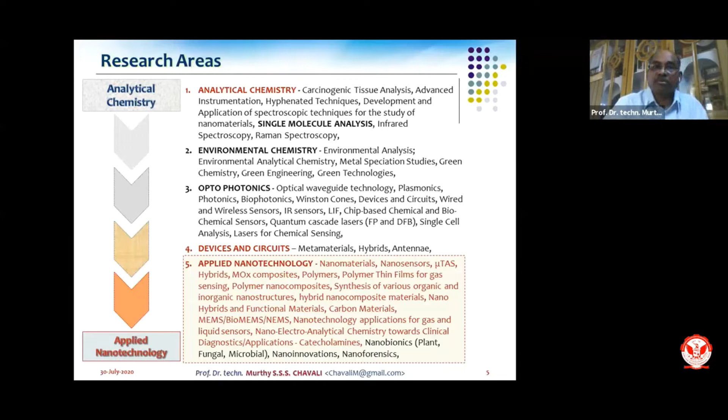At the outset, I started my career as an analytical chemist from Hyderabad JNT University, and then I moved on to different things, to chemical physics, then environmental chemistry, optophotonics as a postdoctoral program in Lawrence Berkeley National Laboratory, where we needed to develop and synthesize the materials for waveguides and fiber optics, which they call chemistry for synthesis, and they took me into this program, though it is not really related, but mainly it is applied oriented.

So we have to take this up, and it gave me some additional knowledge which is helpful for me in doing cross-disciplinary research. And then in applied technology, we are working on nanomaterials, nanosensors, µTAS, hybrids, MOX, metal oxide composites, polymers, and what not. If we see an application related to these things, we apply that in that particular field so that it is useful for society, industry, as well as academics.

So that's why we specifically call ourselves applied nanotechnologists, because our problems don't come from our side or from our group. They directly come from the industries for us to solve and provide solutions. So we start from material synthesis to packaging, device fabrication, integration with electronics, and then commercializing after publications and patenting. That's what we do in these particular areas.

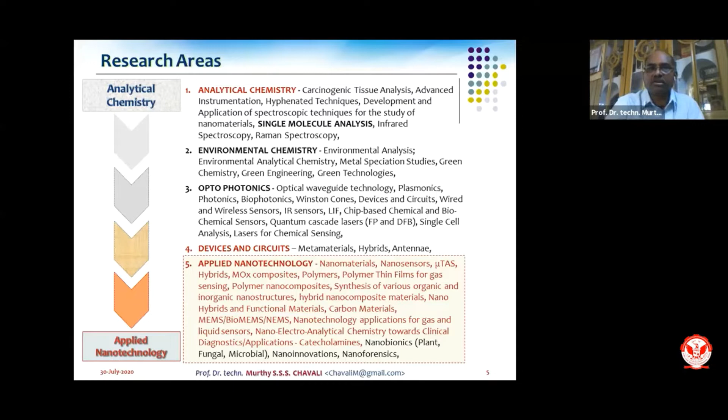And now we started a new group in nanotechnology, which is nano electrochemistry for biomedical science and biomedical molecule analysis, on which I have 2 or 3 slides. In addition to these things, we also work in the fields of pharmaceutical, medical, mechanical engineering, electronics and communications, petroleum engineering, and computational studies, which we recently added to our programs of research. At the same time, we are also trying to switch towards biomass gasification for sustainability. This is in brief what our group does.

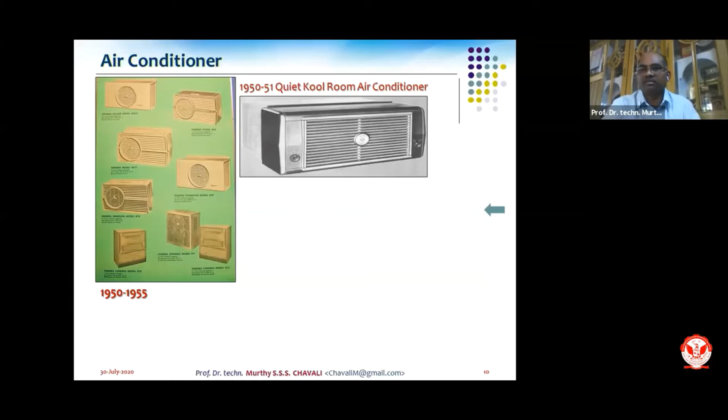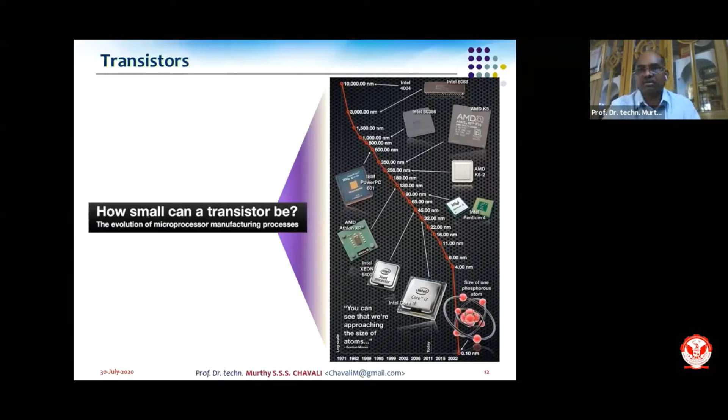And since your expertise is in electronics, you can easily understand how the size of the transistor has come down from 10,000 nanometers to almost 6 to 4 nanometers, and it is still going down further, reaching close to atom size. And most of you know what a flash drive is, what a USB drive is, or what a hard drive is, and types of hard drives, SSD and HDD.

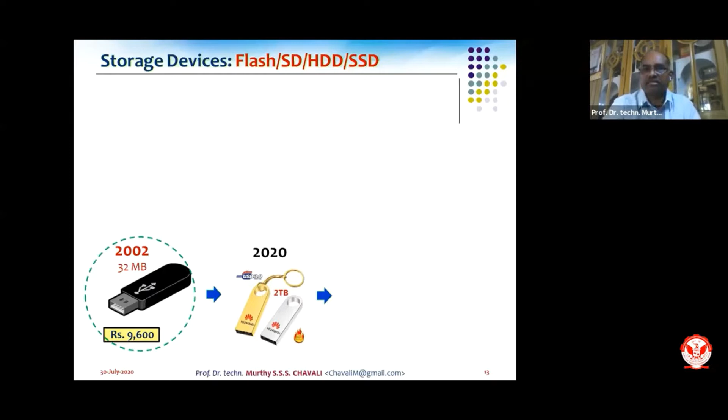In 2002, I purchased my first flash drive, which is 32 MB, and it cost nearly 10,000 rupees. And now in 2020, you have the same size, but the volume is going to be 2 terabytes. This is where miniaturization or nanotechnology comes into the picture, so that you can minimize and increase the capacity, and in 2024, it is going to be like 64 TB in your USB flash drive.

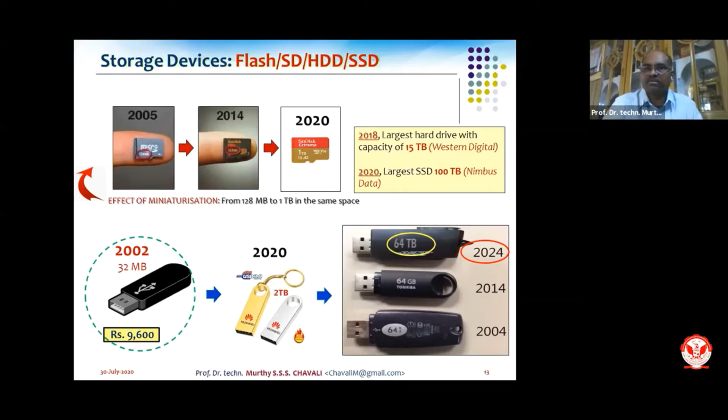But why do we go for miniaturization? Because it has several advantages. Though it might have one or two disadvantages, it does have meaningful advantages, like minimizing the energy of the entire device. And once you minimize the energy, the device is going to be smaller, and the material consumption to manufacture this device is going to be simpler. And you can integrate these things into several platforms, and the statistics of the results output in terms of redundancy in errors of these arrays can be reduced and understood easily. Integration is possible and it is simple.

At the same time, the power budget is going to be reduced. These can be faster because of the simple technologies used. They are less in weight, so easy to carry. And if you talk about sensors, the precision is going to increase, accuracy is going to be great, with increased selectivity, sensitivity and reproducibility. And often there is a possibility to integrate into new devices that are going to come over a period of time, and this can be accommodated in a portable way. In addition to that, they also have some negative impact.

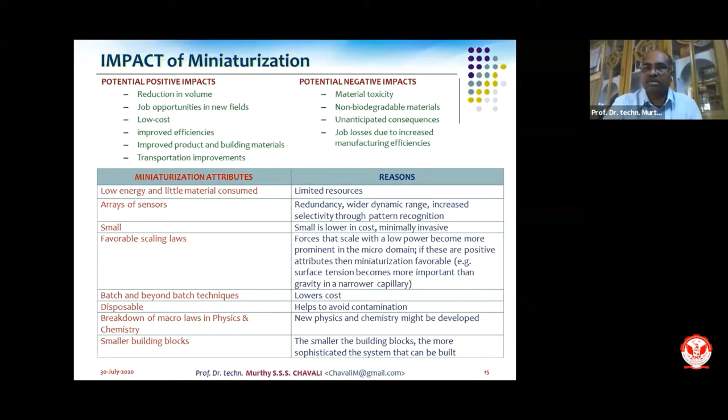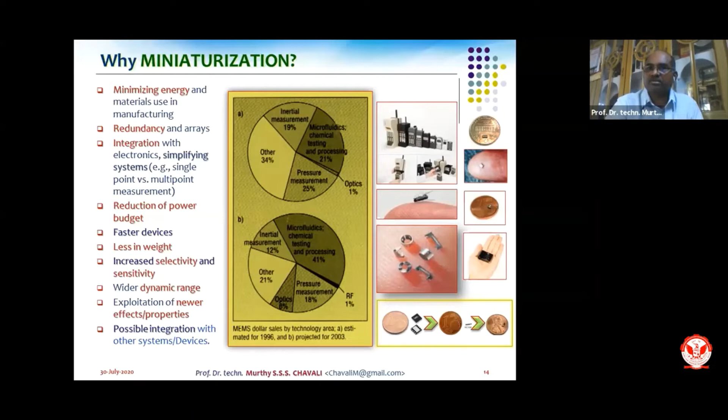And we started to work on gas sensors after seeing these microfluidic lab-on-chip devices and MEMS-based gas chromatography. Gas chromatography is a big one; it occupies almost half the size of a room. But these people have converted the entire thing into a small 5 centimeter unit, which can perform most gaseous separation, and there is a lab on chip which performs the entire functions of a diagnostic center on a chip of 10 centimeters. Moreover, these miniaturized devices are highly accurate in terms of design, architecture, assembly, integration, and packaging, where they found some problems in packaging but overcame them later. These two perform exactly the same way as the macro devices.

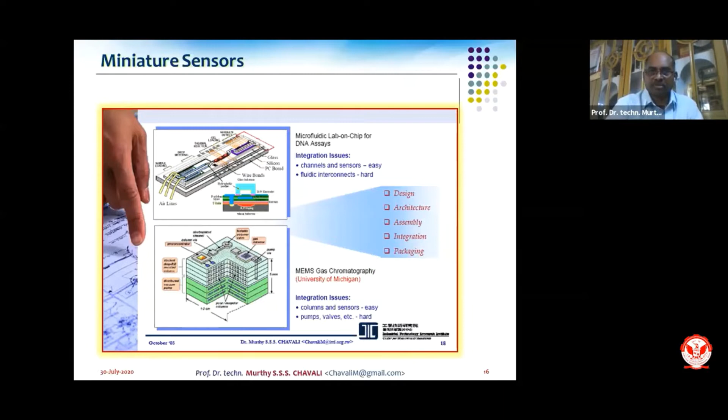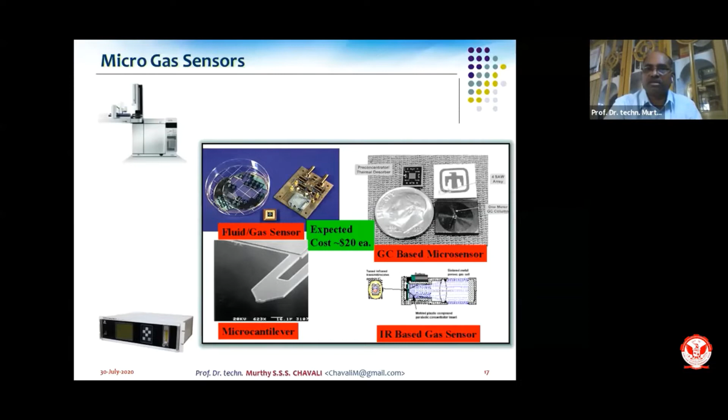So with this, since people have started gas chromatography, we thought of getting into FTIR spectroscopy, because that is the area where I work on. So we want to miniaturize that. And during that particular time, we have seen GC-based microsensors, fluid gas sensors or volatile gas sensors, micro cantilevers, and infrared-based gas sensors. With this infrared-based gas sensor, we thought of developing our own system for gas sensing in parts per billion levels, not in parts per million, but in parts per billion and trillion levels. And the size of this particular system we designated as 5 to 6 centimeters, not beyond that.

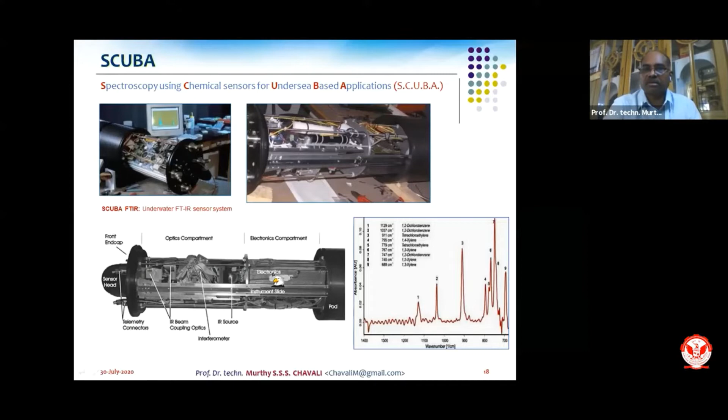We started with Bruker FTIR. We replaced the sensor head, and we have developed something for seawater analysis, where the analysis component, obtained from this front-end sensor head using the same electronics but a different layout and architecture, is exactly the same. And this has been published in Applied Spectroscopy. And we started with a miniature setup for FTIR, where we use the interferometer for analysis, but actually we have removed that one by adopting hollow waveguide technology and incorporating another Winston cone. This simple module has been converted into small 10 centimeter units for FTIR analysis with the same source as well as the same detector we use in commercially available sensors.

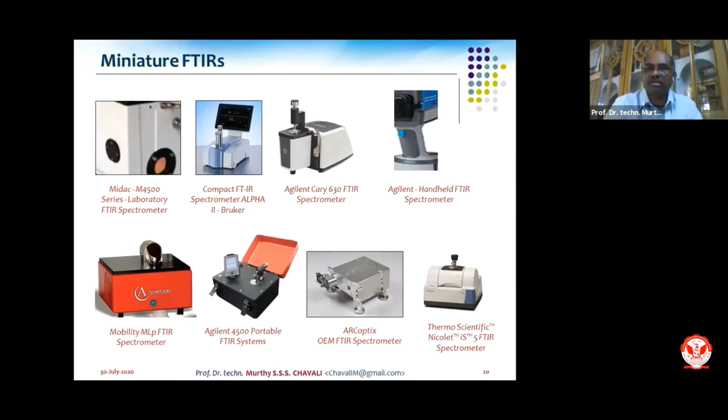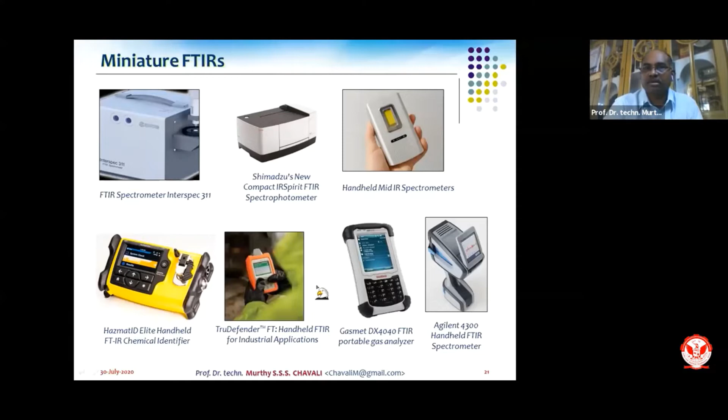So we went for a review of available handheld miniaturized devices, but most of them are highly expensive. So we want to have a very less expensive FTIR for gas sensing in parts per trillion levels. These equipment give only percentages or parts per million, but we are targeting parts per billion and parts per trillion levels. Initially, we failed in getting parts per trillion, but somehow we ended up in 100 ppb levels. So that is close to parts per trillion. So we are happy with that.

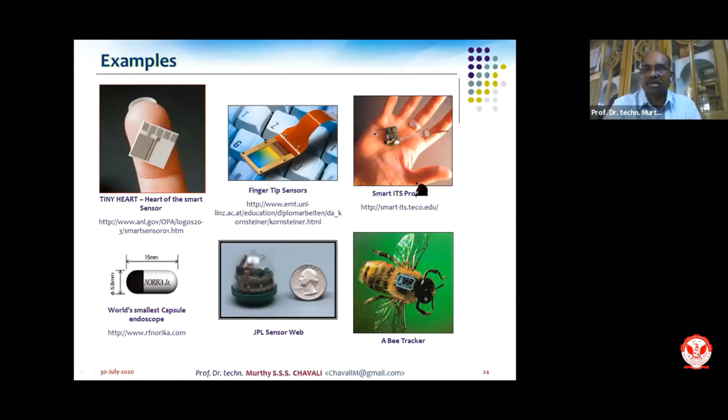And some of the examples, if you take the miniature devices, you can see the smallest capsule for endoscope. You can see the Jet Propulsion Laboratory sensor, which is almost the size of a quarter. And you can also see the Smart ITS sensor, which is on the palm. So these are the simple miniature devices which inspired us to talk to these people. And we have noted some of the sensors like the medical telesensor chip, which is on the tip of your finger, where it can measure the temperature and at the same time transmit the body temperature to other devices. And you have an IR microspectrophotometer for blood analysis, gasoline octane analysis, and environmental monitoring, which is again 2 centimeters in size. This can also be used in chemical warfare agent monitoring, and this can also transmit.

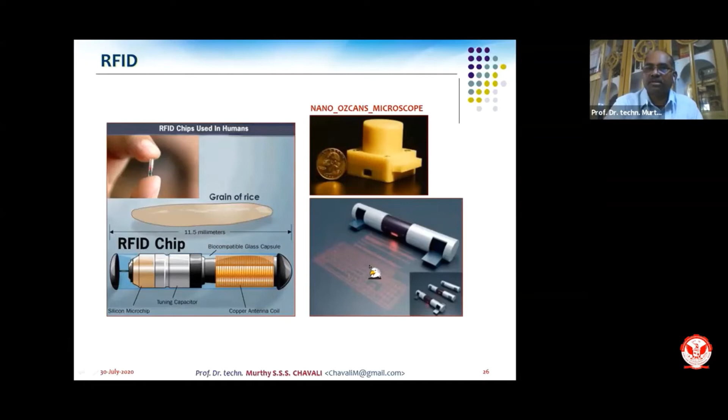So similarly, the entire optical bench of 1 meter came down to 1 millimeter size. These are the advantages of miniaturized sensors. As I showed you the endoscope capsule, we also have an RFID sensor, hologram, and microscope almost double the size of a quarter. So inspired by this, and also by colleagues in other departments working in the field of nanotechnology, we ventured into this as a postdoctoral program, where we were fascinated by the integrated application of nanotechnology, where it combines the biological principles of the materials and the laws of physics and chemical properties of these materials together into one, so that you can develop something in a different way. So our publication volume has increased because we published with macro sensors, then converted to micro, and then converted to nano sensors.

And after converting it to nano, we went into nano arrays. And from nano arrays, we went into wireless sensors. So typically one exact work combining with different platforms resulted in 4 to 5 papers. So since this nanotechnology is going to be a key enabling technology, with the volumes of sales reaching billions, and it also has significant benefits to the environment, and it can be applied in each and every subject, we ventured into it.

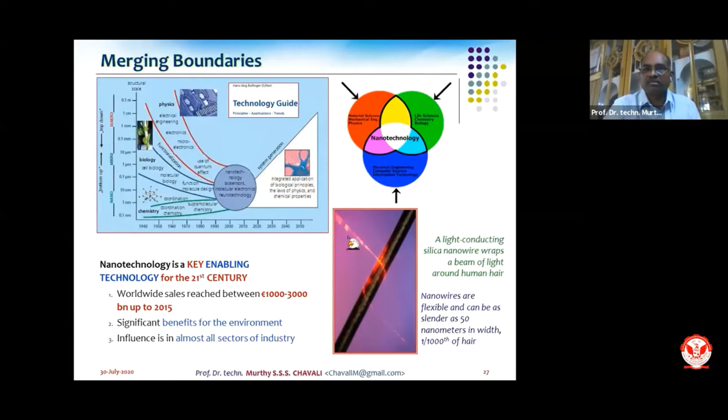Since then, we used to get most of the industrial problems for us to solve. So with this, we were able to do everything related to industrial applications, and that's how we entered into applied nanotechnology. I'm going to skip this one because most of you are aware. And why do we use nanomaterials for sensing? Because it has simply improved physical and chemical properties. And if you use some of the dopants and if you change the architecture or layouts of this, that itself can act as a sensor.

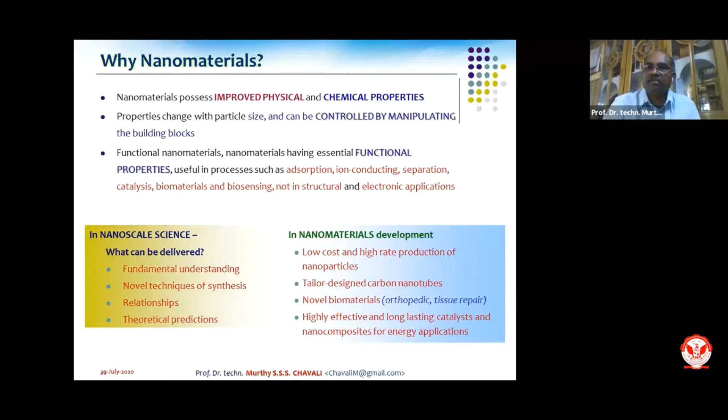For example, if you take a single wall nanotube or multi-wall nanotube, just entwining them can change the resistance or conductivity within the tube. That itself triggers the difference between before and after contact with the gas, and so it can act as a sensor. And additionally, these nanoparticles have unique properties. For example, opaque substances become transparent, like copper. Inert materials become catalysts, platinum. Stable materials turn combustible, aluminum. And solids turn into liquids at room temperature, gold.

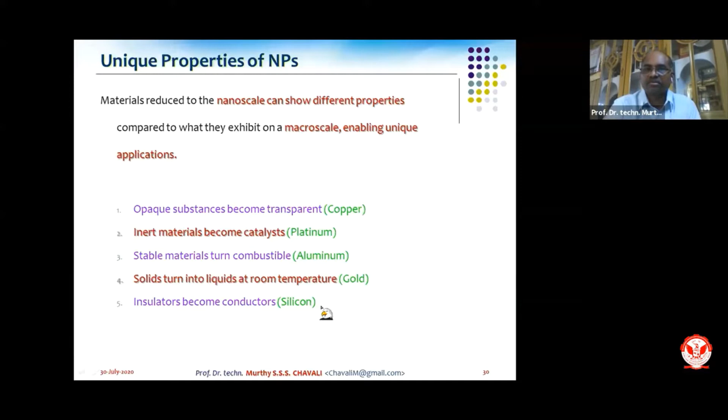Insulators become conductors, silicon. So with these properties, we use these metal oxides and metals as dopants, and we prepare different things. The beauty of these nanoparticles or nanomaterials or nanostructures is you can prepare them wisely if you understand what exactly you need and what exactly you need to show. For example, you take different fields, from immunology to electronics, magnetics and optics, and you take any property that has been enhanced only because of scale length modification. That means it is going to be in nanometers, and once you have nanometers, you have an enhanced property in different subjects.

And another beauty of this particular thing is you can synthesize very easily. You have n number of parameters in synthesis of these nanomaterials. Suppose you change the temperature as one of the parameters; you can get different types of nanostructures. See, you have almost 12 varieties of zinc oxide nanomaterials just by varying the temperature. In the same zinc oxide, by varying pH, you have 4 different types of nanostructures synthesized. So this is one of the beauties. By changing the parameter, you are going to get these things.

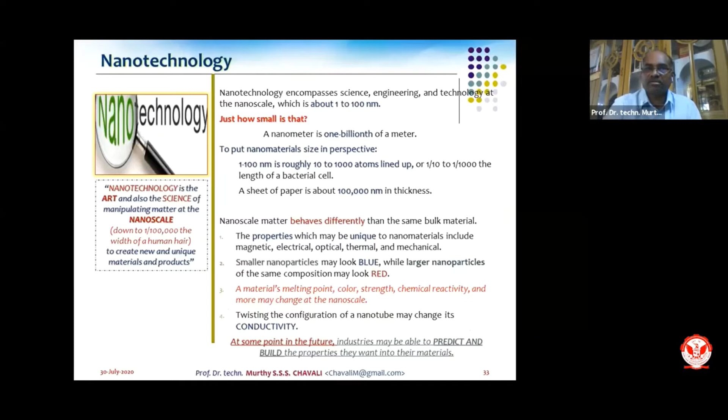And as we already discussed about nanotechnology and nanoparameters, nano is giving a very big opportunity in different sectors like semiconductors, medical, aerospace, textiles, environmental, etc. This is going to boost the inspiration of young researchers to get into nanotechnology. And since we talk about different sensors, why do we need these sensors particularly?

There are so many driving factors for these particular sensors: social, legislative, technological, political, and economic. For example, if you take legislative: health and safety, environment, avoiding prosecution are the legal driving factors for developing sensors. It can be monitored everywhere. Economic: testing materials, cost, process, automation, energy consumption. Trans-country control of boundary pollution is for political factors, and technological factors like improved performance, sensing new variables, and precision and accuracy of the measurement. All these factors are the driving forces for these sensors, especially nano and micro sensors.

For example, if you go onto the street, you have different types of sensors. One, to conserve energy: you don't need a street light on during the daytime, so it has to switch on and switch off by itself. It has been pre-programmed, so you can conserve energy. You need to have high lux units. You need public safety, so you need a brighter light, and it can be simpler and faster to deploy. Maintenance costs are reduced since it is pre-programmed. So these are additional advantages we get from these sensors.

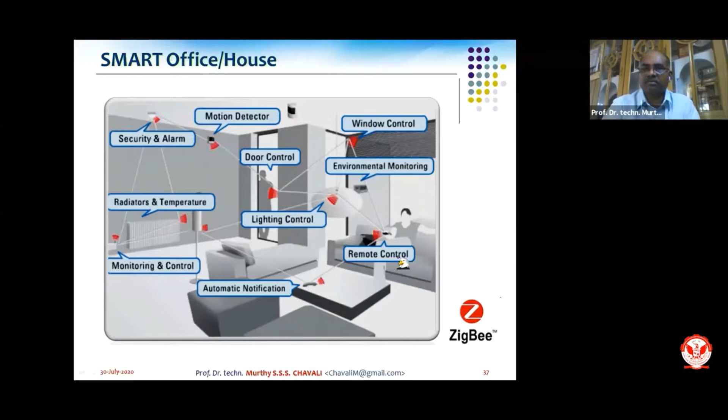For example, a typical sensor, since we are talking about gas and liquid sensors, needs to be precise, accurate, and stable. It should give proper results, and it should be very reliable. At the same time, it should be less expensive, with a low power budget, and it has to be compact and integrable so that it can be utilized on a larger scale with many integrated applications.

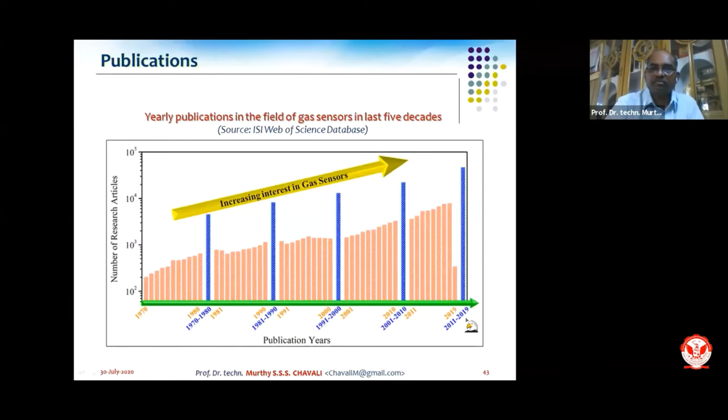So keeping this in mind, we have developed so many things, and one of the main reasons for our group to enter into gas sensors using nanomaterials is the increased interest in gas sensors. This is evident through publications over a period of time. It has increased by almost 10 to 20 fold, and this data is available up to 2019 from Web of Science. And so many materials have been developed. And we have chosen dopants and metal oxides as one of the materials for initial identification as gas sensing materials.

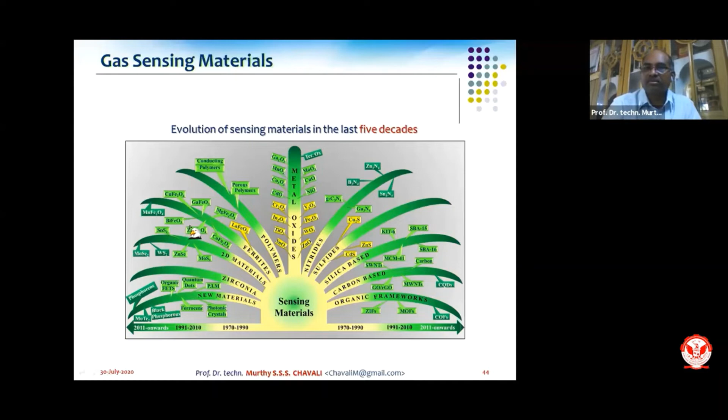And in addition to all these, we typically work on 2D materials and graphene, metal oxides, carbon-based materials, and some hybrids taken either from ferrites or phosphorene. So with this, we were able to publish many works on gas sensors as a platform. Then another problem that we have seen is how do we get these sensor chips? What is the layout? What is the architecture that we need to have?

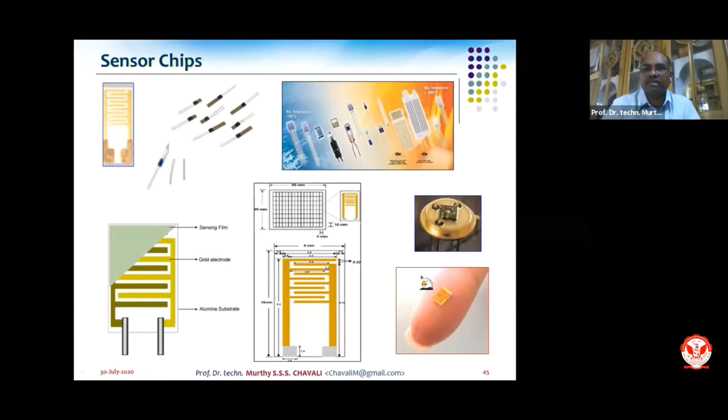So instead of going for commercial things, we typically purchase a platform, which is just a substrate made of alumina. And on that, we started to screen print our interdigitated electrodes. At the end, it is connected to a platinum electrode. So different types of electrodes have been screen printed, different shapes, different variants, different arrays. And finally, we were able to end up with a typical sensor of our requirement.

And during those early days, most of the gas sensors responded at high temperature. That means you need to have a second circuit beneath the alumina substrate, which is for heating. A single millivolt change in electricity is going to give a change of 100 degrees in temperature or so. So typically the platforms we have used are covered with ruthenium oxide so that we get the required temperatures.

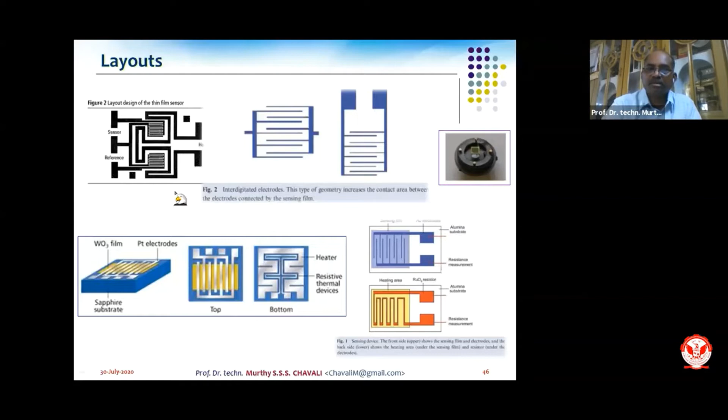But that is not the requirement of the day. The day demands, the society demands a sensor which is precise and works at room temperature, not at high temperature. So ultimately we have to eliminate the heating element from the bottom, and then we have to develop something only with the sensing device.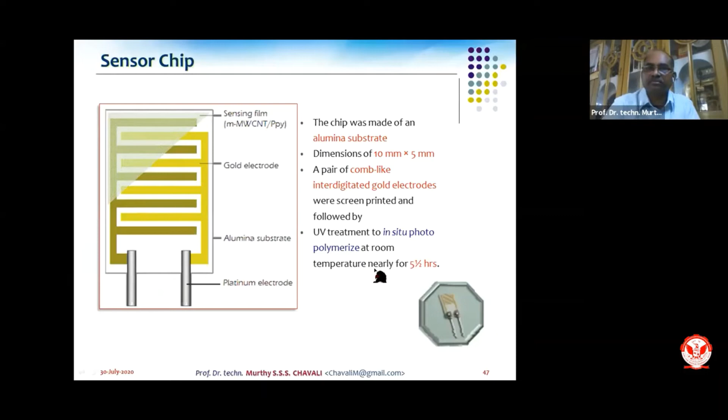Our typical sensor looks like two interdigitated gold electrodes connected to a platinum electrode, and we have a sensing film. The entire thing is in the dimensions of 10 millimeters by 5 millimeters. This is the real picture of our sensor, and this can be put as an array, and at the same time you can use it as a single chip sensor for initial applications. So what exactly we do is we develop the chip and then coat it with our transducing material, then subsequent calibration and sensing study.

And as I said, most of the materials we use are carbon-based materials like graphene oxide, graphene, fullerenes, CNTs, and other metal oxides, dual metal oxides doped with CNTs, triple metal oxides, inorganic-organic hybrids, polymers, composites, etc. All these things will be studied because most of the time we may get one or two as the best results, but at the same time, these redundant results will be useful for our experience to use for different

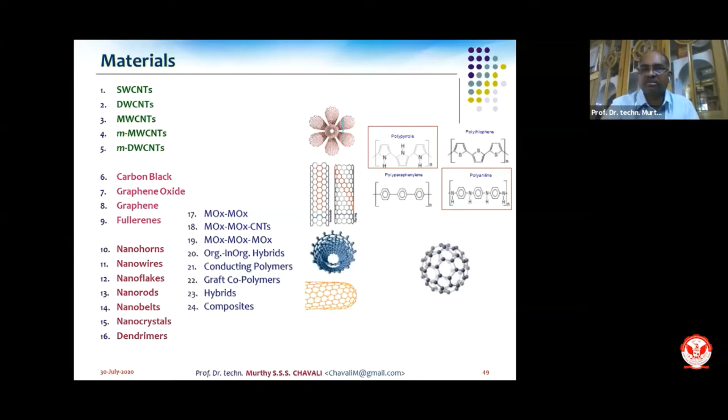types of gas sensors. For example, when we were trying NO gas sensing, we got a good result that might be useful for NO2 gas sensing. So ultimately, we were able to develop an NO gas sensor as well as an NO2 gas sensor. We initially used tin oxide, titanium oxide, iron-based tungsten oxide, indium oxide, and ferrites. So we used all these things initially, and in combination, we are using many other things, specifically for conductive

polymer-based gas sensing. We initially started working on a CO sensor using cobalt oxides, and the sensor is good enough and it has a heating element. But the problem is it responds at 230 degrees centigrade, which is a very high temperature. We were able to detect in the order of 1000 ppm to 500 ppm. But still, this sensor is not in the market because of one disadvantage, which is the 230-degree sensing.

So finally, we ended up developing a material, cobalt oxyhydroxide, adding an additional oxygen atom into cobalt hydroxide, so that this sensor works at room temperature. We were able to do the sensing studies, and the present-day cobalt oxyhydroxide sensor works at 100 ppb levels at room temperature, and it is completely versatile without interferences from other gases, as we have shown here. The sensor dynamics follow the path in a textbook manner, and this has been commercialized as small devices, in the order of 10 centimeters, in developed countries.

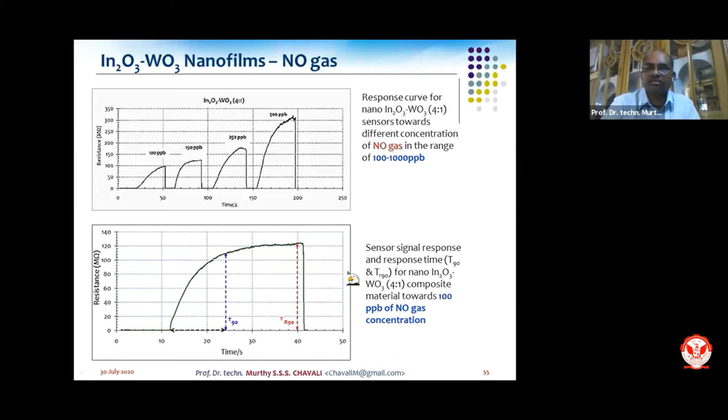Another one is an Indo-Taiwan project, where we developed a nano sensor; we initially failed, but the odd results gave us a proper setup. In this, we were able to do something with 4:1 indium oxide and tungsten oxide using the same sensor chip. We have perfect dynamics. We went up to almost parts per trillion levels. 100 ppb is the initial thing we developed, but we ventured into parts per trillion levels. You can also see the T90 response, and these are perfectly all right for the project work.

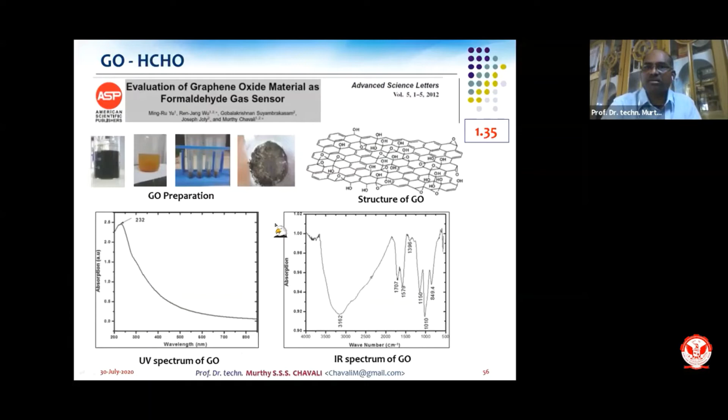Later on, the biology department asked us to develop a formaldehyde sensor, since they use excessive formaldehyde for cleaning and many other things within biological departments, tissue culture, animal tissue culture, plant tissue culture, etc. We started developing a graphene-based sensor, but we were unable to convert graphene oxide into graphene because of the lack of an inert atmosphere table or chamber. So we started to work on graphene oxide, but that itself proved very useful, and we were able to develop something with graphene oxide for detecting 50 ppm.

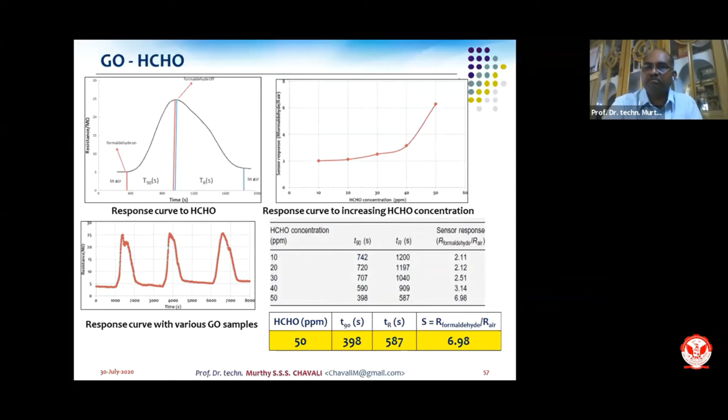What the biotechnology industries need is something in the order of percentages to very high ppm, but this one comes down to 50 ppm. After this, it was extended with a graphene-based sensor for formaldehyde detection, which gave almost a 150 ppb result using graphene compared to graphene oxide.

After that, since I said I'm going to take one example from each category, we have hybrids for NO gas for enhanced sensitivity, what I have shown from indium oxide and tungsten oxide, and the beauty of this is these hybrids are prepared by microwave methods.

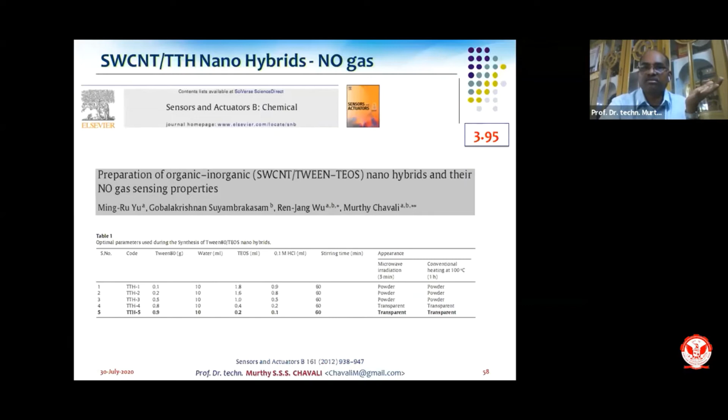And in hydrothermal methods, probably we need 3 days time to prepare these nanomaterials. And these nano hybrids in microwave method typically took 3 minutes. That means we have saved almost 48 hours in preparing these materials. And it also gave very enhanced results for NO gas sensing. And we also have something on this particular gas dynamics, and at the same time, faster response and improved characteristics for these materials, because these are hybrids.

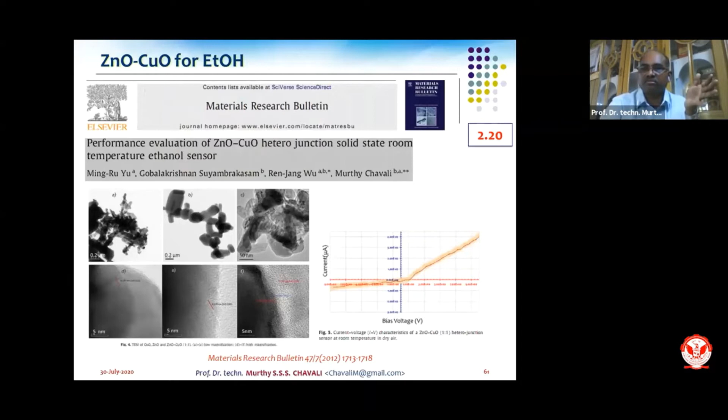And the same thing we have used for ethanol sensing for the meteorological department, where we used a different material as a heterojunction zinc oxide, copper oxide material as a solid state room temperature sensor for measuring ethanol. This also gave very good results in terms of sensor dynamics, where you can see 150 to 250 ppm with very good linearity. And this solved the purpose of developing a metrological standard for ethanol sensor.

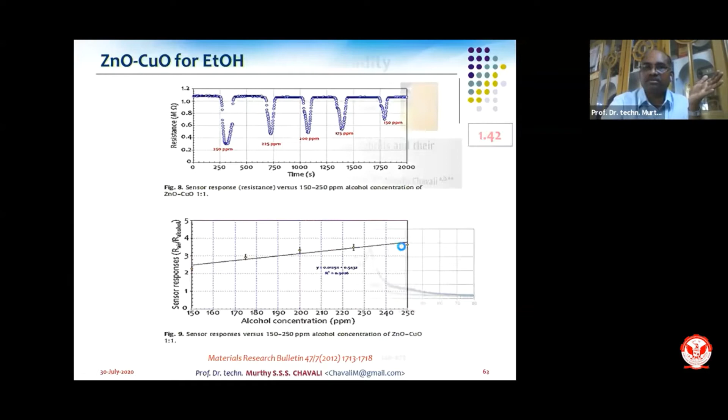And using the same hybrids, we measured humidity. Later on, since our gas sensors, specifically CO, CO2, NO, oxygen sensors, ozone sensors have been placed in hospitals, the World Health Organization has given us some additional work where we have to develop something for anesthetic agents. The reason they have asked is the patient in the OR is being treated with anesthetic agents. Once the operation is done, he is out of the operation theater, but the amount of anesthesia given to the person is higher than the concentration required for the person to be operated. So the rest of the anesthesia is freely available in the operation theater, and it is affecting the doctors and the support personnel who are regularly moving into the OR theaters. For this particular purpose, the Occupational Hygiene Department of WHO has asked us to develop some sensor for anesthetic gases.

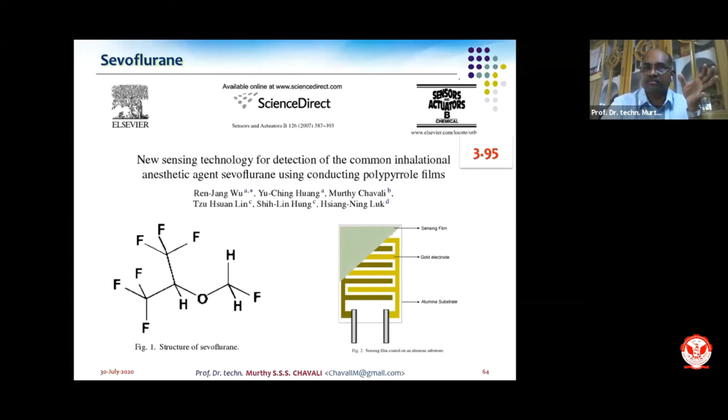Initially, very crudely, we have used a conductive meter for measuring with this particular sensor, and this has been published in a 3.95 impact Sensors and Actuators journal, but very crude. And it took nearly 3 to 4 months for us to develop this particular sensor because we had so many stability issues. And we have studied this using the Materials Studio software, and you can see this redundancy, but still it is one of the best and simplest methods to analyze anesthesia in various places. Because in earlier days they used to measure with integrated hyphenated techniques, meaning the cost of analysis is going to be very high.

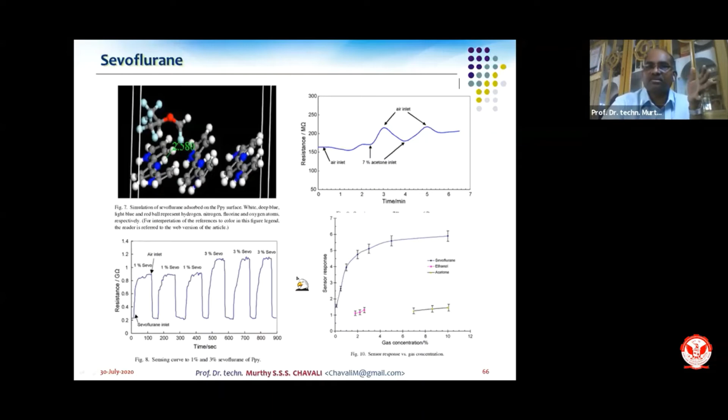Each integrated hyphenated technique like NMR, FTIR, GC, and all these things are going to cost you something in the order of 1 crore. But with this particular sensor, we were able to measure with less than 3,500 rupees. So this has been studied with a very high-end FTIR spectrophotometer of 0.01 wavelength resolution, and commercially available hyphenated technique spectrum, and our results are completely similar. Only thing is cost has come down, analysis time has come down, so we were able to propose this.

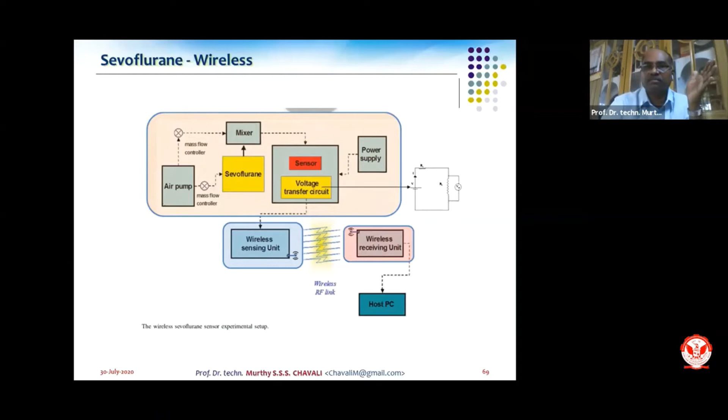So most of the sensors we have developed, initially we tried with 25 meters, and after that we were able to extend this to a distance of almost 500 meters. So most of our sensors have been transferred into wireless sensors. Typically the gas sensor dynamics are going to be very reliable, and we were able to measure something in the order of ppb, and most of these were also placed in hospitals for commercial purpose.

And after that, this particular year, based on our past experience in medical analysis, we were given epinephrine analysis, a neurotransmitter which is responsible for so many side effects. For this, our previous strategies did not work, so we had to come up with a new nano-electrochemical electro-oxidation mechanism, so that we will be able to detect something in the order of lower micromolar concentrations.

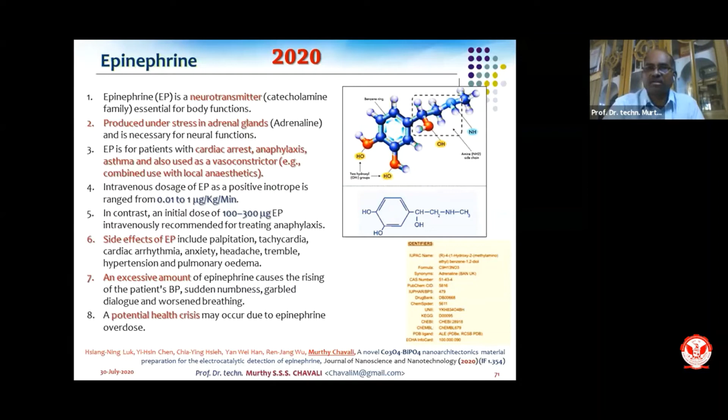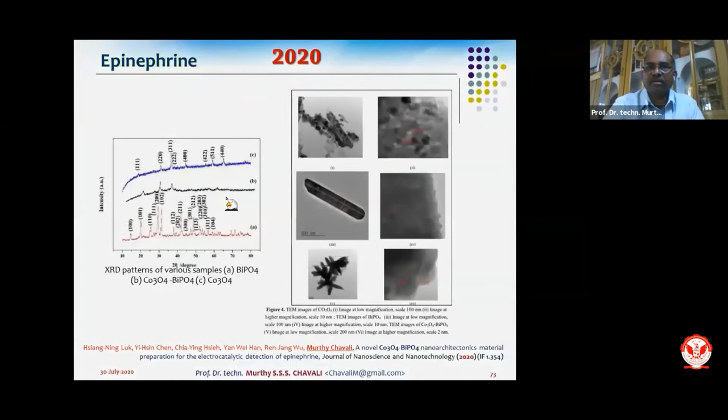...which we have done in January, and it has been published in the Journal of Nanoscience and Nanotechnology in this particular year, where they use HPLC-MS, fluorescence, capillary electrophoresis integrated with others, and electrochemical analysis. All are going to be very expensive, but simply we came up with a 3-electrode system for electro-oxidation mechanisms, and we have studied this with cobalt hydroxide, cobalt oxide, and bismuth phosphates as a material for epinephrine, and we were able to do something in the order of 1.72 micromolar, the lowest where we were able to detect.

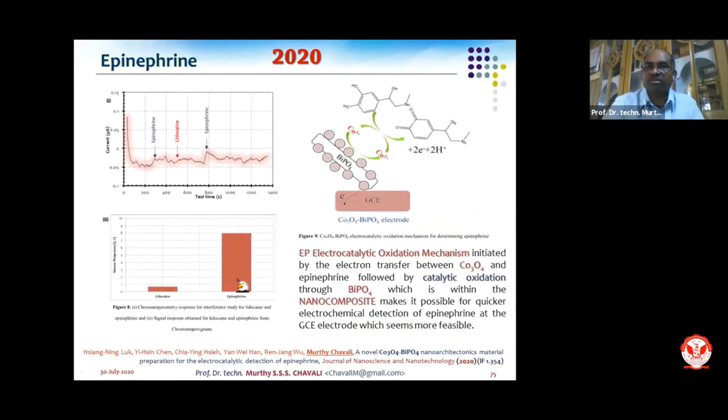Since we have different types of other systems where we can measure this electrochemical oxidation mechanism for epinephrine, we started to do this with another Pt-doped SnO2 material with the same. Only difference is this material is a core-shell nanocomposite material. With this, we try to do something in a better sensitivity manner, and we were able to achieve something in the order of 0.35, much better, almost 4 to 5 times less than previous one that we have published in Journal of Nanoscience and Nanotechnology. And this work of core-shell nanocomposite from Pt-SnO2 material has been published in Journal of Chinese Chemical Society, that is also in March 2020.

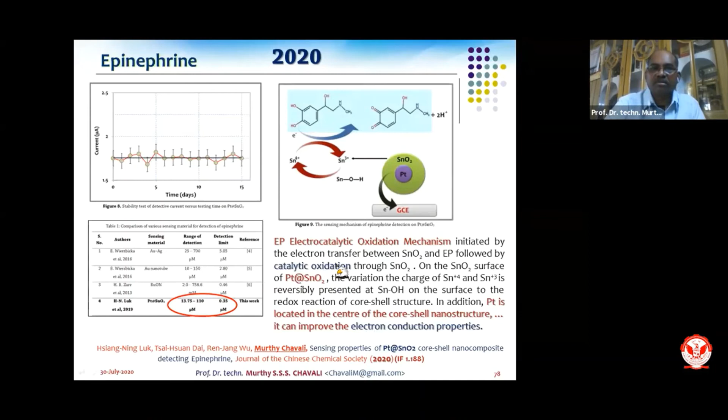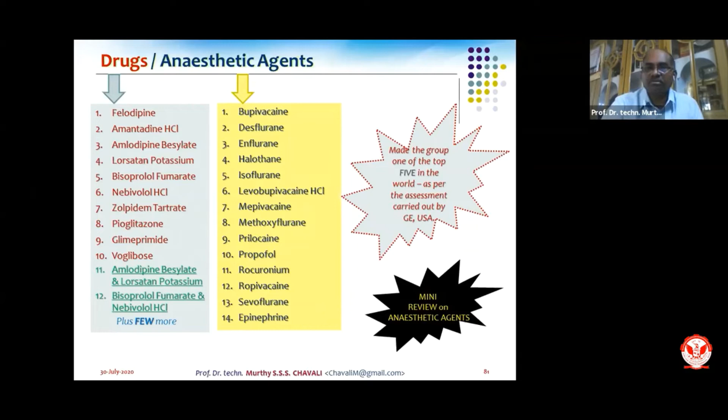Earlier, we collaborated with ethylene sensor development with Canadian government, and that ended up in developing different types of gas sensors, especially in the order of ppb, but that turned out to be a very good sensor in healthcare system. And this project extended to $23 million project with Canada and Taiwan government, where we were able to measure ethylene in the previous sensor. The same strategy has been adopted to measure acetone in breath. That means indirectly we are estimating the diabetes mellitus type 2 ailment using these TiO2 nanowire sensors, and a single TiO2 nanowire sensor does not give any proper result.

So we adopted a strategy to have an array of sensors put together, and then we have done some mixed signal circuit designs in Canada, and finally gas test measurements, and finally we developed a typical commercially available handheld sensor, which is specifically designed for ethylene, but this works for healthcare and medical purposes for identifying and monitoring diabetes by measuring acetone in the breath. So this is one highly commercialized thing in healthcare system.

And later on, since we worked on nanomaterials of graphene 2D and 3D, people started to talk about wearable electronics. Our first project also, which we applied for DST, has come up with a dual gas sensor using a single chip, and they don't want any concentration measurement, but they want only an acoustic signal to be coming out. So that means these people are going to use these particular sensors as wearable devices, almost the size of 1 centimeter, to be put up on their collars.

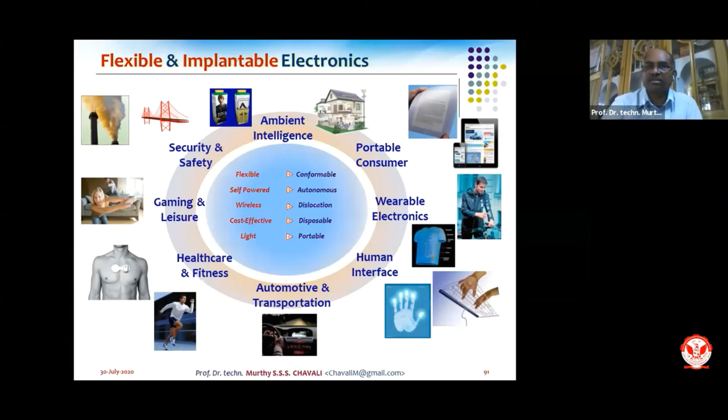Earlier, macro sensors were converted to micro, micro to nano, nano now to wireless, and to this wireless we are adding an additional parameter like smartness, so it becomes a smart wireless sensor with novel integrated in situ technology, chemical technology, and combining all these things, we are going to have multiple outputs so that it can be utilized for different varieties. A recent thing is skin-inspired wearable electronics for humidity, mechanical sensing, and temperature sensing.

These are very, very simple, and the same thing can be transferred to biological purposes for sensing different types of viruses, bacteria, and identifying the toxicity levels using these particular nanosensors. Just by simple alteration, you can develop these for those applications as well. And instead of going to a hospital and standing in queues, you can be monitored by having wearable electronics on your body, and these can be transmitted to your personal doctor, and at the same time a remedy can be obtained.

And if the sensor is smart enough, you are going to be directed or action will be taken by the sensor itself, and it will be convenient, timely, portable, and completely comfortable without any problems with these wearable health monitors. People are working on these smart devices right now. And in addition to that, people are also working on implantable devices for bioelectronics, drug delivery systems, and at the same time, wearable energy harvesting devices that supply energy to these devices, and so many other things. All these things are going to come up.

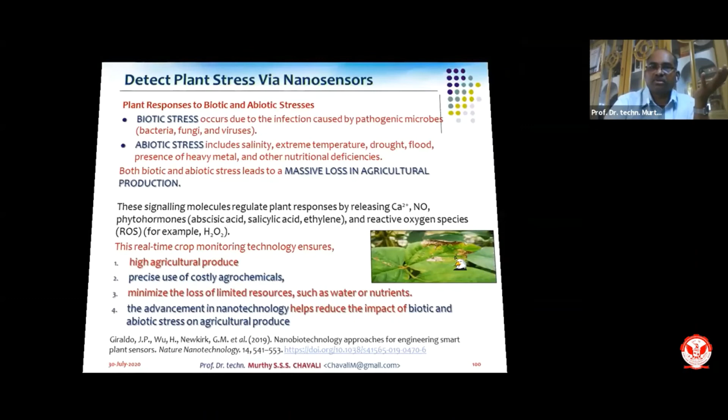And we are also working on different materials that may cause stress to the plant. It might be biotic stress or abiotic stress. Typically, our sensors are based on limiting abiotic stress, but still they can also be used for measuring biotic stress so that high agriculture produce can be achieved, and precisely use costly agrochemicals or limit their use. At the same time, advancement of nanotechnology and green chemistry procedures will reduce the loss and increase agriculture production.

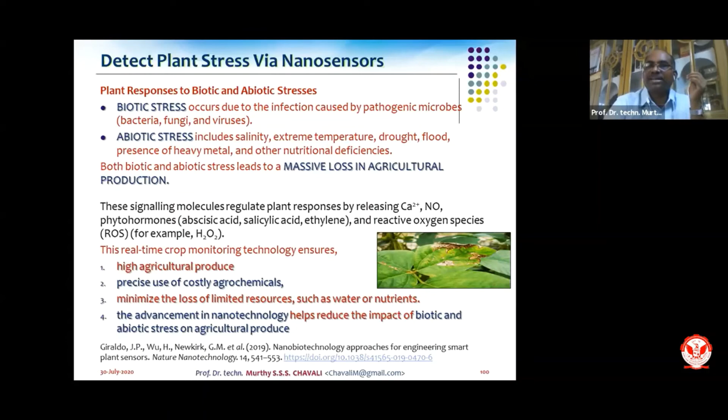So with this, there are so many other varieties where people are trying to use different types of RAMs in the electronic industry using nanotechnology: MRAM, SDRAM, static, dynamic, so many other things. And people are using magnetic RAM, etc. That I'm not going to cover here because it is already taking a lot of time, and we need to give some time for the audience to ask a few questions.

So typically, these are the nanomaterials for nanoscale sensing. You can use different strategies, different layouts, different architectures to develop and refine your sensor till it goes to commercial level and publish so many things. At the same time, you can use catalytic, magnetic, or optical strategies for sensing schemes. And you can also eliminate by complicating your layouts. You can integrate these things so that you can go up to zeptomole detection.

Zepto in the sense you can go to concentrations of 10 to the power of minus 21 on the biomedical scale, and you can integrate them for removing toxins, and you can also use them as bots so that many things can be performed in gas, or liquid in gas measurements, and so many other things.

But one important thing before we apply them to so many fields: the safety of this particular material should not be ignored. So one has to be very careful in utilizing and working with these nanomaterials, and the directions given by nanotechnology committees should be properly understood and read, and the standards and legal procedures in nanometrology and nanostandards should be utilized for a cleaner, better, and greener environment, so that as we always strive to enhance our comfort, this particular field can also aid in producing more yields, giving greater comfort, etc.

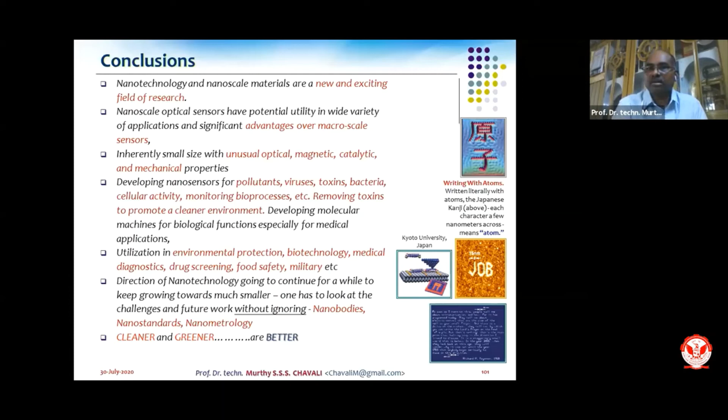And these are some of the selective areas with the different types of materials that we utilize and work on in our departments towards sensing and electronic applications.

And with this, I'll give some of the references which might be useful for you people, students or the faculty, in terms of working related to safety of these nanomaterials and other regulatory issues that are being involved in synthesizing, working, and developing these things.